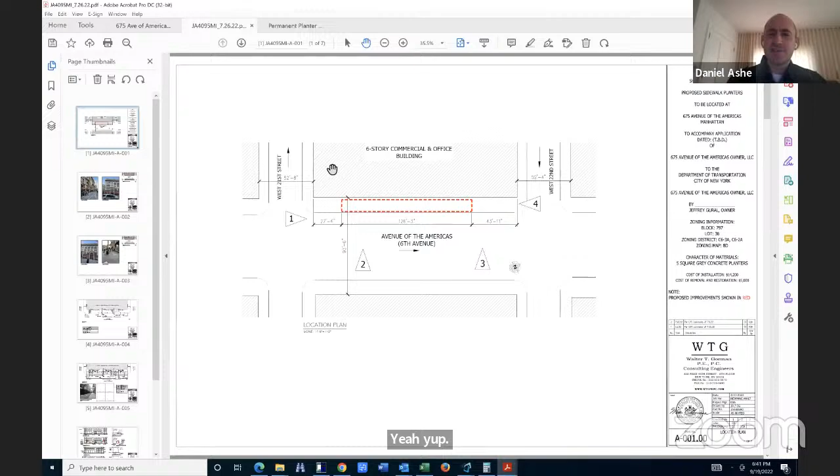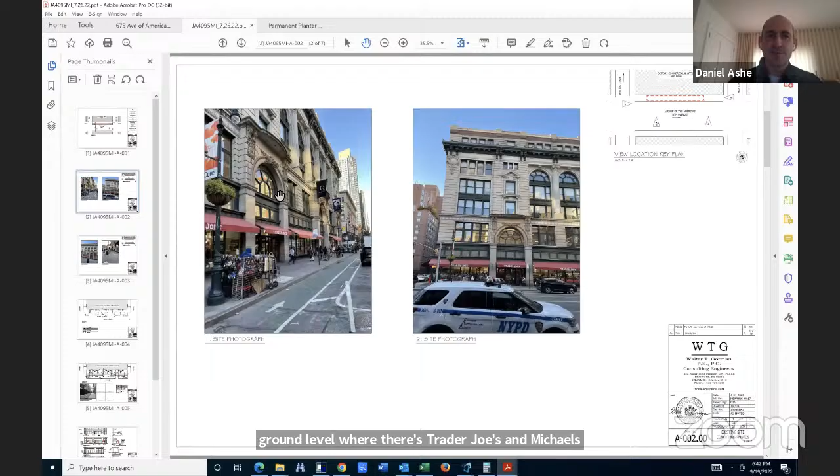Yep. All right, so our building is a 6-story building. It's mostly office, you probably know better the ground level where there's Trader Joe's and Michaels. And so here's some current pictures of the site. We're hoping to make it a little more beautiful to put in planters.

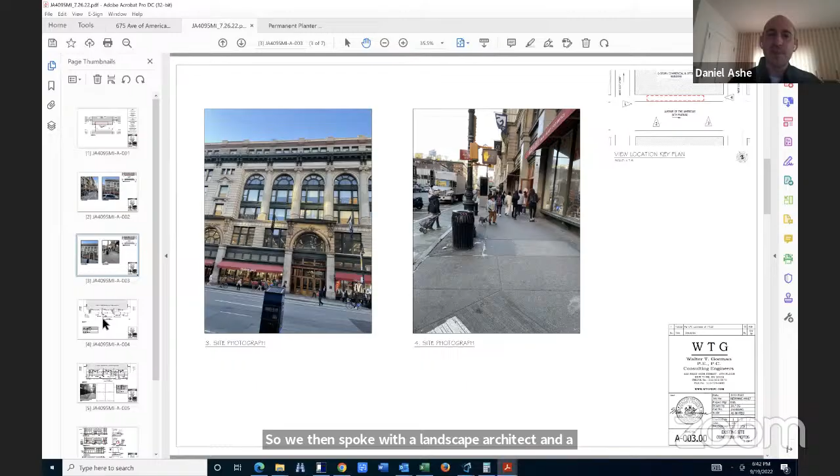Other places in the neighborhood we saw had it. We were trying to figure out the best type of planters, and we went over with the DOT and their guidelines. They were pretty strict on the type of planter that was allowed, the exact size. So we then spoke with a landscape architect and a landscaper to figure out what we can put in that would meet their requirements. And so we picked locations that met the requirements for separation from distances, from the corner of the property, from any parking meters. And we came upon our final decision of putting 5 planters here.

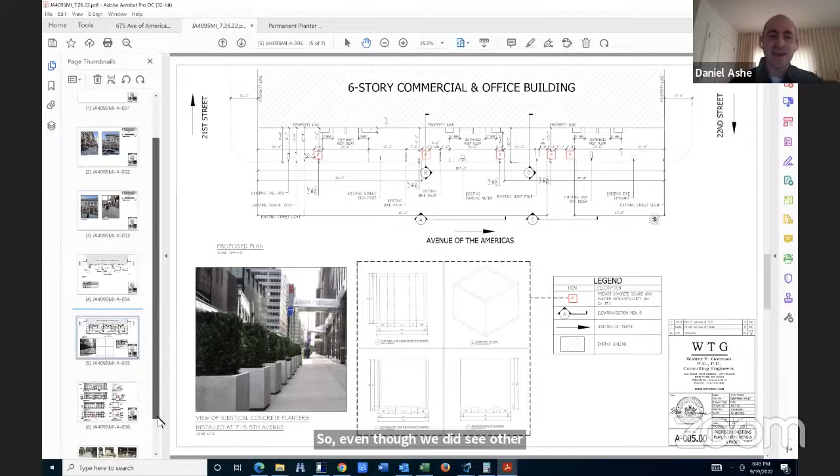As you could see, they're all going to be square planters, very similar to what this view is. DOT had requirements about the reveal, that it couldn't be touching the ground, that it had to be solid shape. So even though we did see other planters in the neighborhood that were different looking, we didn't feel that any of those met the requirements for the guidelines, and therefore we settled on this. The DOT, in discussing with us, we've gone through their preliminary comments and we've answered all of that already.

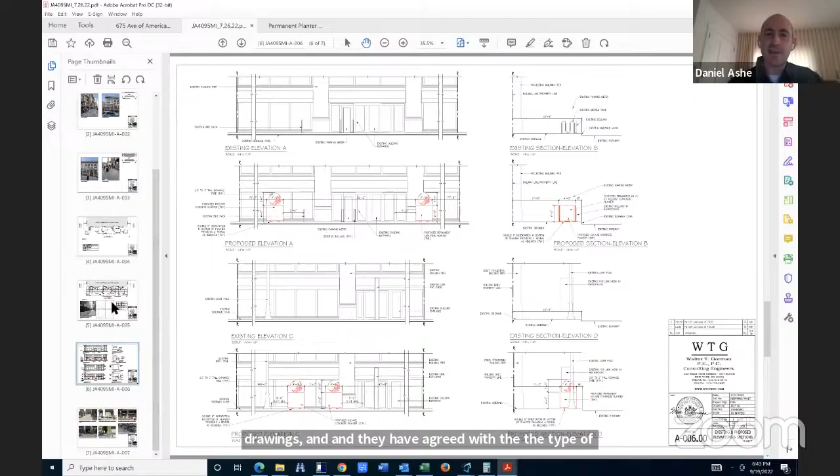So they've seen these drawings and they have agreed with the type of planter and the locations. Here you can see some other planters in the neighborhood that we took pictures of nearby, but varying shapes and sizes, not big enough to meet the 64 cubic feet requirement that the DOT has. And that's how we came to our design.

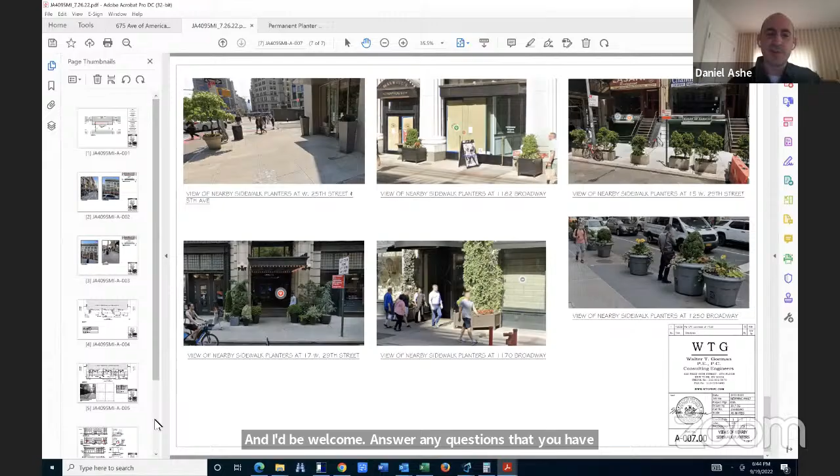And I would be welcome to answer any questions that you have regarding that, or to re-show anything that you want to see. Great, thank you.

I'm going to just give a little bit of background on what we've done since we got this application. We've just been going back and forth with LPC to ask them what are exactly the rules around planters. And this is a note, I quote directly from their note: when a planter is large enough to warrant a public hearing, elements such as size, spacing, aesthetics, and how it fits into the overall context of the neighborhood are all taken into consideration. Also, for this particular item, weighing an application's appropriateness is more focused on the streetscape than the building. So that's directly from LPC.

And we also spoke to the Community Board Transportation Committee, and they will be reviewing this application. So of course we can ask as many questions as we'd like to at this point, but our feeling is that whatever we decide should be conditional on what that committee says. So is there anyone else who has any questions? I see Lowell, and then Pamela, and then David.

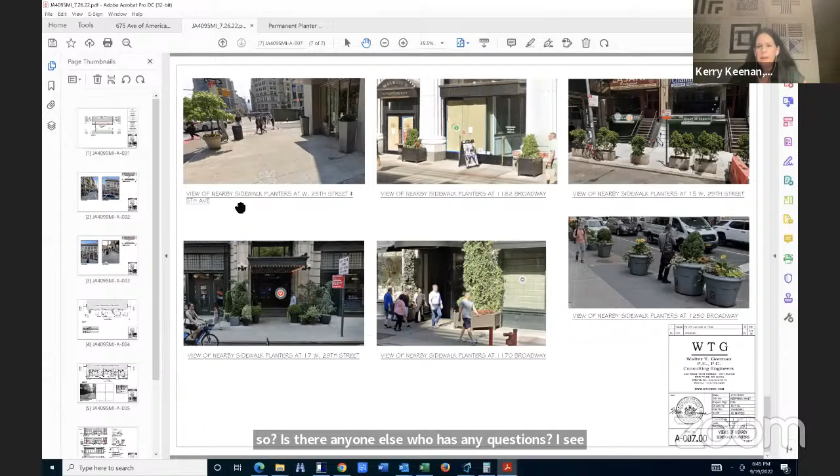All right, Daniel, could you go back to the picture of the front of your building?

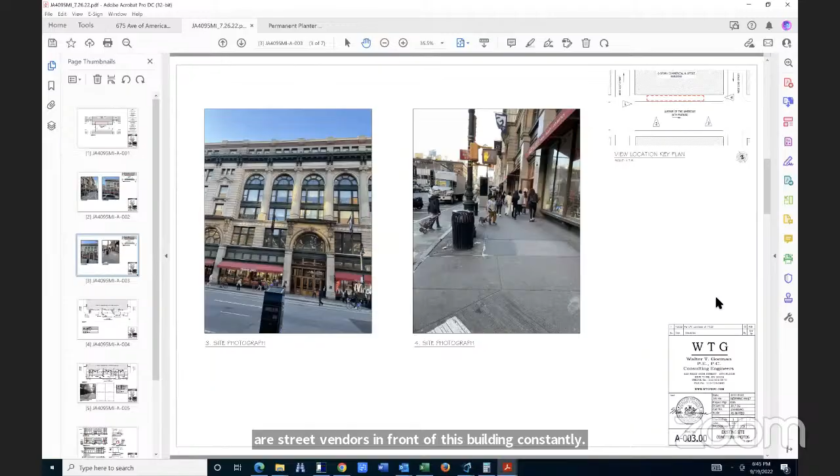See, I have a problem with this picture, and I have a problem with this application because I don't think this picture accurately reflects what the front of this building looks like. There are street vendors in front of this building constantly. You cannot walk down this block without seeing street vendors. And coincidentally, there are none in this picture.

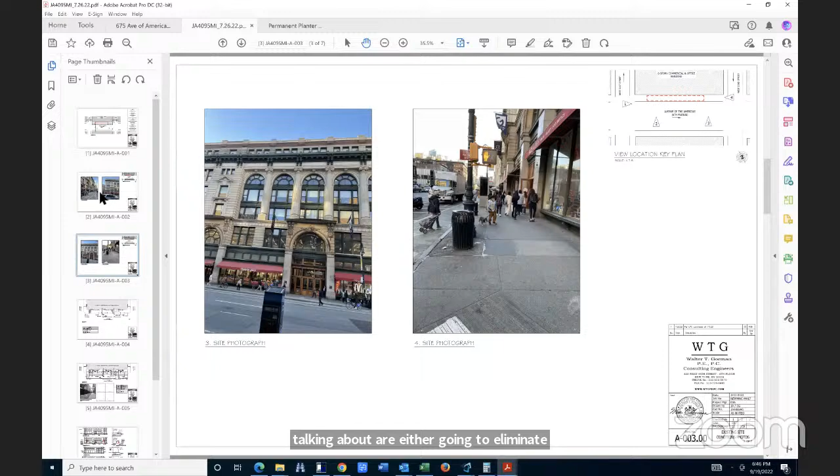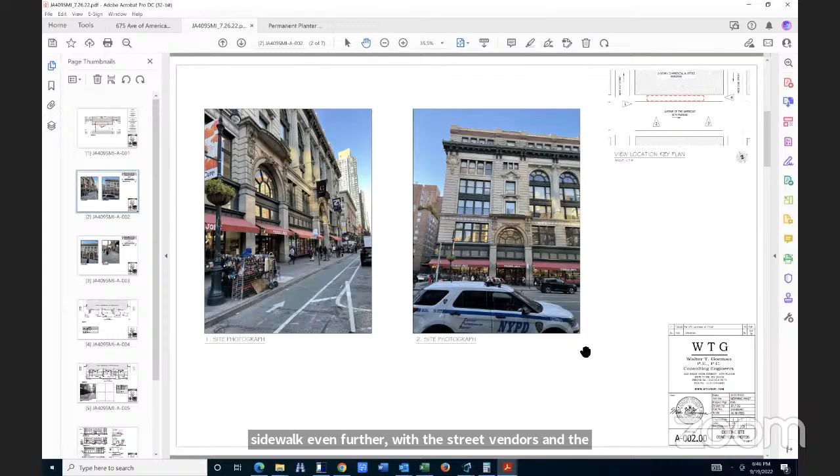I am concerned that planters of the size we're talking about are either going to eliminate the street vendors who are not here to speak for themselves, or are going to narrow the sidewalk even further with the street vendors and the planters. So I've got an issue with this, and I don't know how we represent the guys who are out there selling fruits and vegetables and whatnot, or whatever else they're selling out there. But these site photographs do not, there's one there, but this entire block is usually covered, and I don't think this accurately reflects what we're looking at.

Pamela, want to address that, Daniel? Well, these pictures were taken at different times. I know there are other vendors that come and go here. And they did have the opportunity to join.

We posted all the notices along the front of every opening in the building, so they would have seen it, anyone who uses this street for vending. Some of the vendors would be affected because they are actually not set up in a legal location to begin with. They're too close to the entrance of the property. So it is something that we want to keep this street in front of the building to have some consistency, and this will force them to a location where they wouldn't be out of compliance with proximity to the entrance.

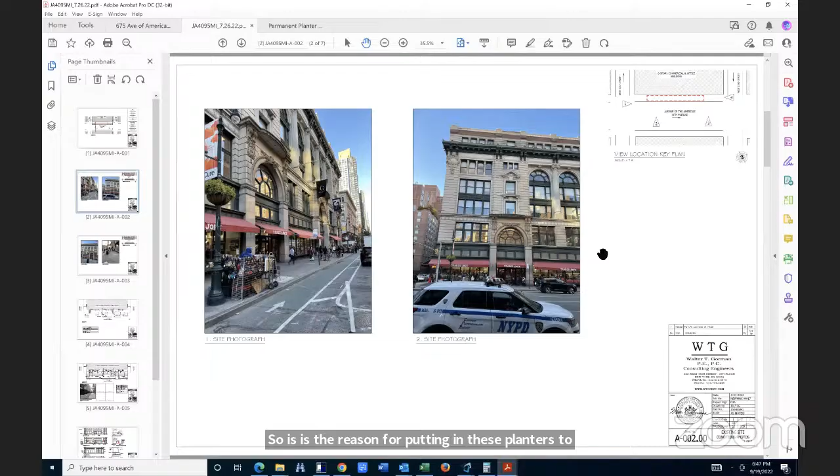So is the reason for putting in these planters to eliminate the street vendors? The reason I was given from the owners that asked me to get involved with this was that they wanted it to look better in front of the building. I'll read between the lines on that one. Thank you.

Thanks, Lowell. Pamela? Yeah, hi, I'm leaning toward Lowell's opinion here, but I do recognize that it's not always full of street vendors. There are generally more than just the one, the anchor guy that you see in the left side of the left picture.

Those that are not licensed, the vendors, do need to pay more attention to staying away from the primary entrance to the space, and I agree with that. The planters, I would like to know how much space there is between each planter for pedestrians who may want to step out through there and get clobbered by a bicycle they don't see coming. I'm a little concerned about that because it's directly on the bike lane, which is a very popular bike lane, as we all know. So I see a few hazards.

Also, I'm always very much in favor of as much green as we can get anywhere in this city. And I think the Ladies Mile further south from there has benefited hugely from having greenery, planters at the street and also on the islands. It's made a major improvement on 6th Avenue. So my concern again is primarily at the entry of the building, which should be left more open, and also pedestrians stepping through into the bike lane.

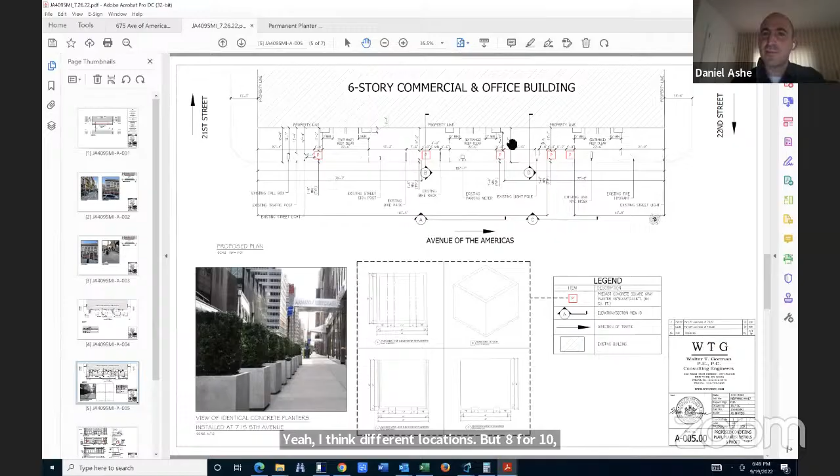So first, I want to make sure that the planters will be on the sidewalk portion. We're keeping a 1'6" between the edge of the planter and the edge of the curb, with the bike lane being over here. People will have the ability to step around it on the side closer to the building, where we're maintaining, in different locations, 8'10" basically between the planter and the building for the pedestrians to walk. In some cases, even more.

And I see you've left enough space at the entry so that there is a wide opening at the building entrance. Yes, we're keeping a 22-foot clear at the entrance, where we showed it marked off there. That doesn't show in the photograph. You can't really tell that in the picture.

From the, I don't think we did a mock-up photograph. This was just an example of what the planter looks like at another location. This is just to show you the color of the planter and what the plants are going to look like, and that there's a little reveal at the bottom. So you have 1, 2, 3, 4, 5 planters. Thanks, Pamela. David? Sure, thank you.

Lowell and Pamela kind of beat me to my questions, but I think the issue is what 715 Fifth Avenue looks like there, that's much different from what you're proposing, where these boxes are just kind of randomly spaced. Can you talk a little bit about that, or what the height of the planting will be?

I routinely ride in that bike lane, and I would be concerned about someone concealed behind a planter and a shrub suddenly stepping out. Is there going to be visibility through or around these? How tall do you expect them to be? What do you expect to plant in them? And do you have any rendering that shows the length of the block with the planters spaced as they would be, which is kind of random?

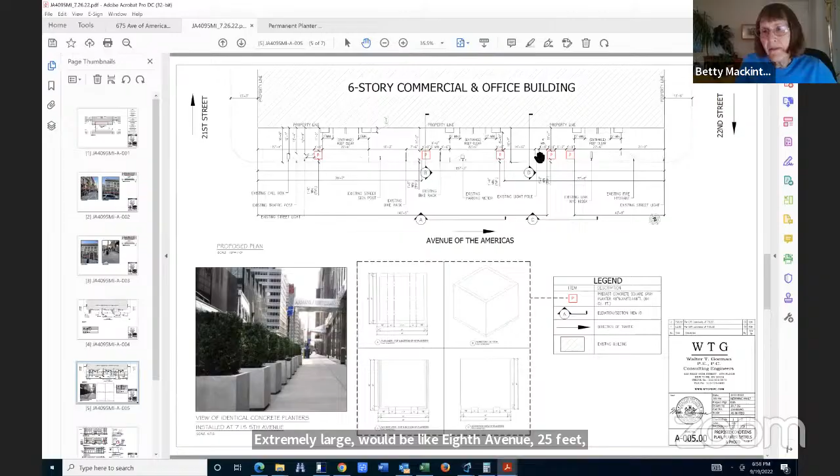Yeah, because I think Daniel said it was 8 to 10 feet. What is 8 to 10 feet? Between the planter and the building. Daniel, can you clarify that? Yeah, the minimum width between the planter and the building you can see here is 8 feet 10 inches.

So less than 9 feet. There it's about 11 feet. So is that the width pedestrians have to walk through? The entire sidewalk is about 16 and a half feet, and we're reducing it down to 8 feet 10 inches in the smallest area.

So it goes back up after that. That's only for 4 feet, and then it opens up again. Yeah, but when you're walking along the sidewalk, you're walking straight — it's a traffic jam, you'd have to go around. Anyway, I've made my point, I think.

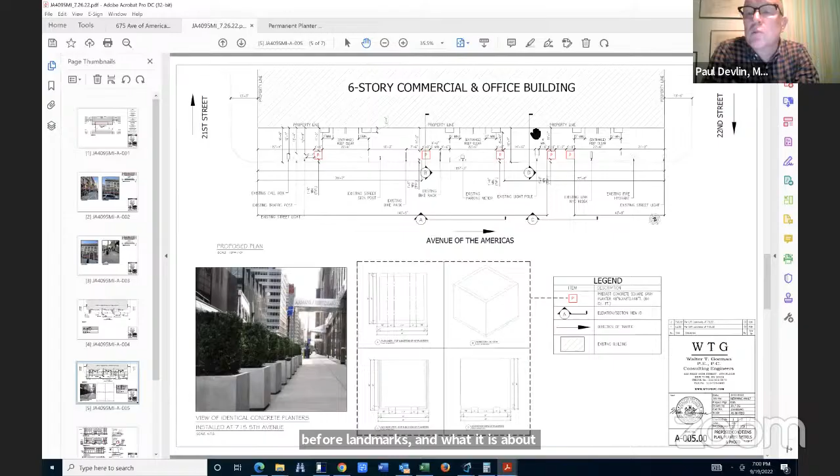From the land use perspective, and our request about a Landmarks Preservation Commission application, I would think we want to hear more about the landmark and preservation issues and less about pedestrian flow and width of sidewalks, because that will be tackled by transportation. So I'm hoping, Daniel, you can give us — you haven't mentioned much about why this application is before landmarks and what it is about these planters that is restoring some sort of historic fabric to this block. If you could address that, I'd appreciate it.

Would you like me to respond now? Yes, please. Okay.

Well, we're kind of handcuffed in terms of the look of the planters, in that DOT guidelines told us the color and the size. So this did not give us the ability to match it to anything historic along the building. And I don't think there's anything historic about the sidewalk through LPC. I could look at the designation photos, but I believe they just had a standard sidewalk to begin with. So there really is not.

I understand your question, and I would not say that anything in this application is to bring about any more landmark aesthetics. It was just to keep the sidewalk on its own, separate from the building, making it uniform and having some green area there, hopefully making it look better.

Are there any other committee members who would like to speak on this? Jesse, is there anyone from the public? Oh, Viren?

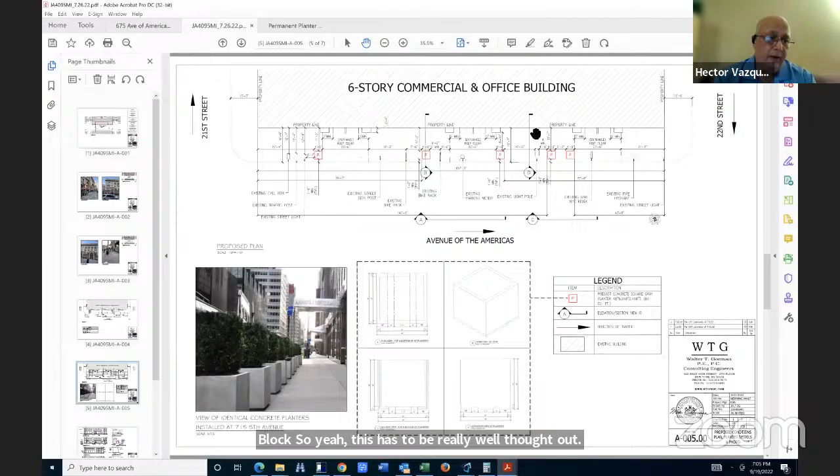Thanks, Kit. Hector? Yeah, rather than rehash everybody's comments, I'm in agreement with the bottleneck that these planters are going to create. Trader Joe's is right there, and I'm sure everybody remembers during the pandemic the lines that were formed out there. I can imagine, God willing we don't reach epidemic numbers again, but if there were lines out there again, that would create an even greater bottleneck. There's no open space, along with the safety issues with the bike lane and everything else. And it's already crowded as it is because of Whole Foods, Trader Joe's, and the other stores on that block. So this has to be really well thought out, and I think the planters are just way too huge to leave a safe, accessible walkway for pedestrians in general.

Great, thanks. I'm just going to go to Miran because he's not spoken yet. Hi, just very quickly - I just want to echo what Viren said. I'd like to hear more about what other options of beautifying the block have been considered. This couldn't be the only thing.

Great, David, thank you. Yeah, I think ordinarily we'd see a presentation that showed the planters in the context of the architecture and how they related, or maybe historic photos of the area that showed how these were in keeping with what was there historically, or honored an idea that was there before. We're not seeing any of that. And I think in general, in a historic district, when you're introducing something new, the most general thing you can say is that it should have a commensurate quality of design. This is just sort of random planters placed where they were able to fit them because they matched DOT's requirements. And to me, that's not up to snuff with what you'd want in a historic district. So I wouldn't be able to support this.

Thanks, David. Okay, Mike, and then we should probably try to wrap this up. No, just one final thought - was any consideration given to just some tree pits along the sidewalk there?

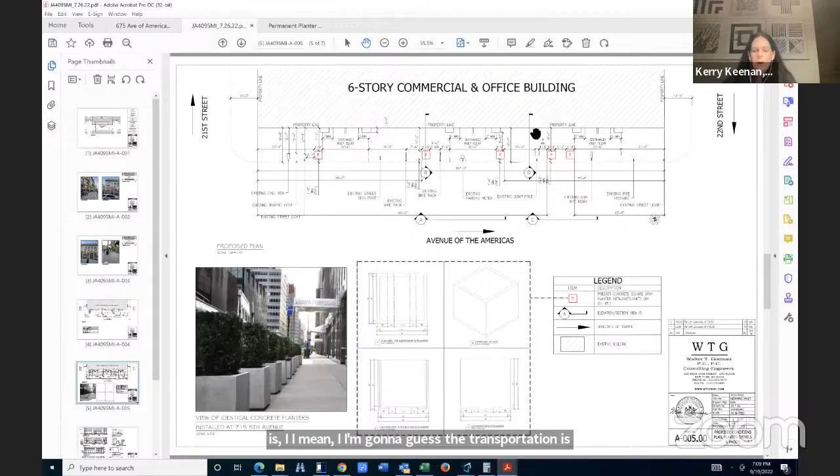So Paul, I see your hand is raised. Yeah Kerry, can you reread the language you read earlier about what LPC said?

Yeah, in regards to this, because again we're talking a lot about issues that are not in our purview. And I think if we're going to write a letter, it should be addressed to tackle the LPC issues. And then within our letter, we can defer to transportation on these other conversations.

Here's what it says: when a planter is large enough to warrant a public hearing, elements such as size, spacing, aesthetics, and how it fits into the overall context of the neighborhood are all taken into consideration. Also, for this particular item, weighing an application's appropriateness is more focused on the streetscape than the building.

So I actually think what we're discussing is really quite relevant. All right, I agree. And we were unclear a little bit too as to why this was coming in front of us, so we went and did that research.

So I do think all of the concerns that everybody has brought up are appropriate for our committee. I know that you will also have to go in front of transportation, and they will be even more focused on congestion and what's happening on that street, and how wide the sidewalk is, et cetera.

Does anybody have a motion that they'd like to make? So moved, the way you described it, Kerry. So moved, approved, recommended to approve, deny. I don't think I can make a motion.

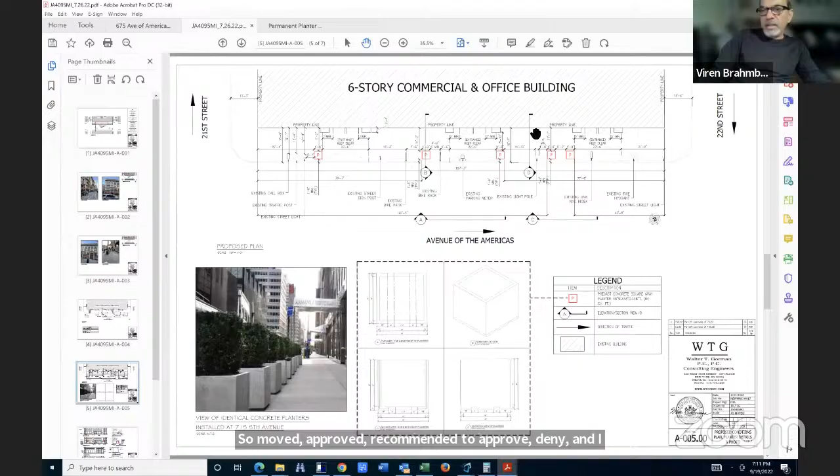Taking into all the concerns expressed by the committee, motion to deny. I would second that.

So let me just be really clear. It's a motion to deny for the aesthetic historic fabric of the neighborhood. We're not really sure why those planters are in those spots, et cetera. The concerns that we have with the sidewalk itself, the amount of space for pedestrian traffic, the vendors, all other things already on the street, the lights and the mailboxes and the links, and also safety of bikers and pedestrians regarding the bike lane and the visibility. All right, and size and the overall quality of the sidewalk.

I would lead with the things that you read before, Kerry, that Landmarks expressed as concerns, because they're always happy to say well, the other things aren't our purview. I know. Okay, all in favor? Aye. Aye. It looks like that passes.

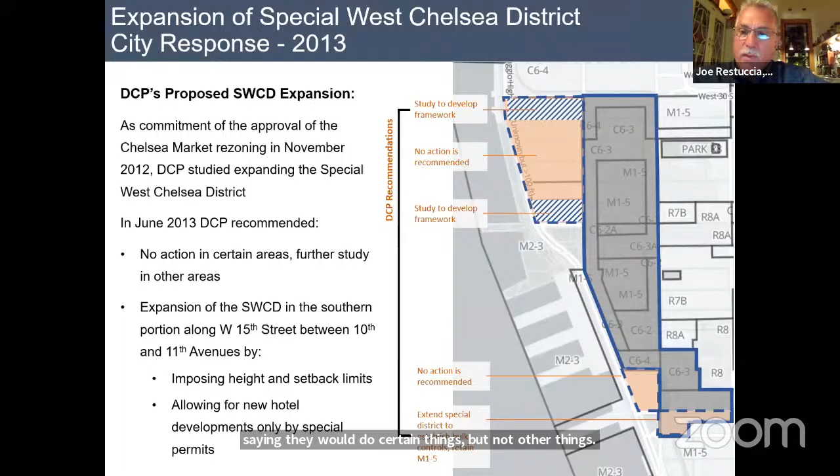This is the Chelsea Market rezoning from 2012. We asked for a follow-up study as to why certain areas of West Chelsea were not included in the West Chelsea district, which was established in 2005. The goal was to create more locations for affordable housing to be built, through inclusionary housing. In 2013, the Department of City Planning responded saying they would do certain things but not others—they wanted to look at frameworks. And the big issue was we didn't want hotels west of 11th Avenue.

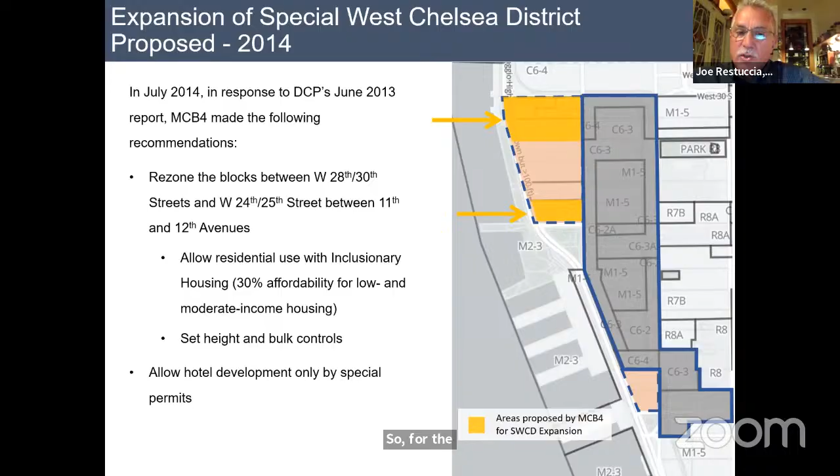Then in 2014, our board responded and came up with specific recommendations through the Chelsea Land Use Committee to rezone certain blocks to allow for expansion and for affordable housing to be built as part of it, with certain additional height and bulk controls that exist in the West Chelsea district.

The next thing that happened after a framework was developed for block 675, that's 29th to 30th Streets, 11th to 12th Avenues, an actual zoning proposal from 2 different developers, and originally a third for the entire block, was put forth. Those rezonings went through a full ULURP and were adopted in 2021. What happened in those 2 sites, it was rezoned from a manufacturing zone to

This is Starrett-Lehigh first, and it was specifically to allow more commercial use on Starrett-Lehigh. I apologize.

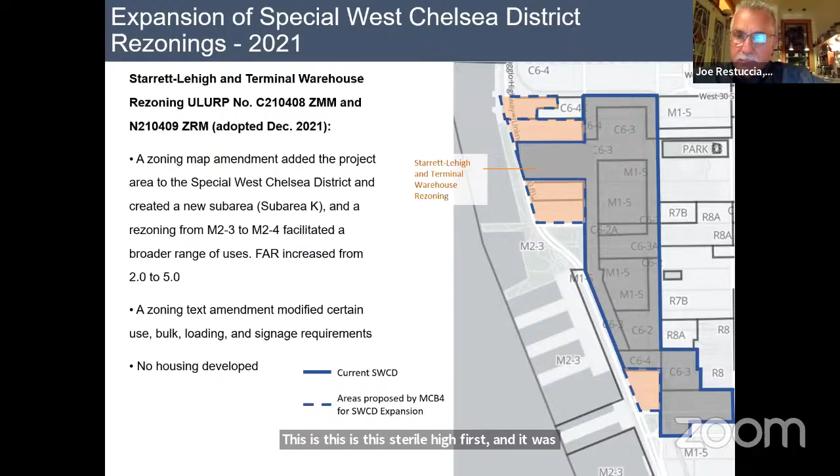We also dealt with block 675 as part of this. That's the 29th to 30th, 11th to 12th Avenues, 2 separate rezonings that were handled in different parts of the plan that allowed rezoning from manufacturing to C6-4, commercial and residential use. In fact, there are 2 new buildings under construction, one that has just been recently completed, 601 West 29th. This part of the district also allows the use of Hudson River Park development rights, and we'll look at that

in another section. Right now, we have in front of us 2 areas that have not yet been rezoned. The balance of block 675, which this committee had dealt with recently regarding the Gateway Tunnel and the EMS site, and B, which is the entire block to the south between 28th to 29th, 11th to 12th, and that is Con Ed.

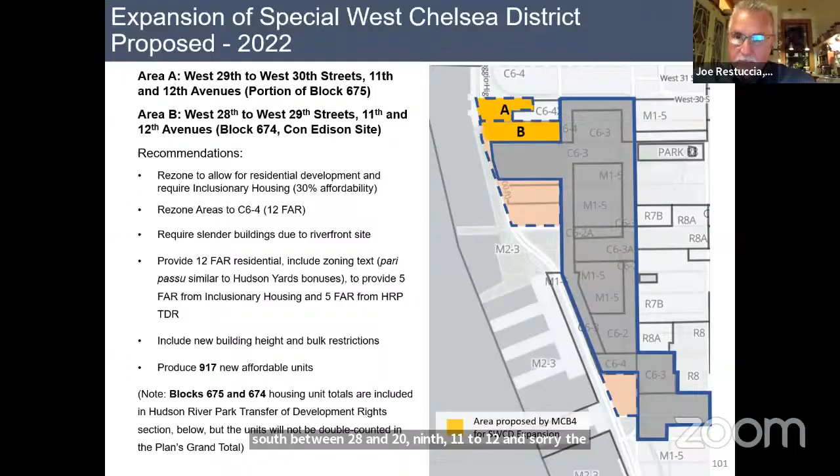The last are a series of public uses to the south, right north of Chelsea Waterside Park: the post office vehicle maintenance facility, and the sanitation maintenance facility. Again, we asked for this to be rezoned, this time not to C6-4, but to C6-3, 7.5 FAR, consistent with the zoning that exists along West 23rd Street, a lower density. These sites together would produce 442 units of affordable housing.

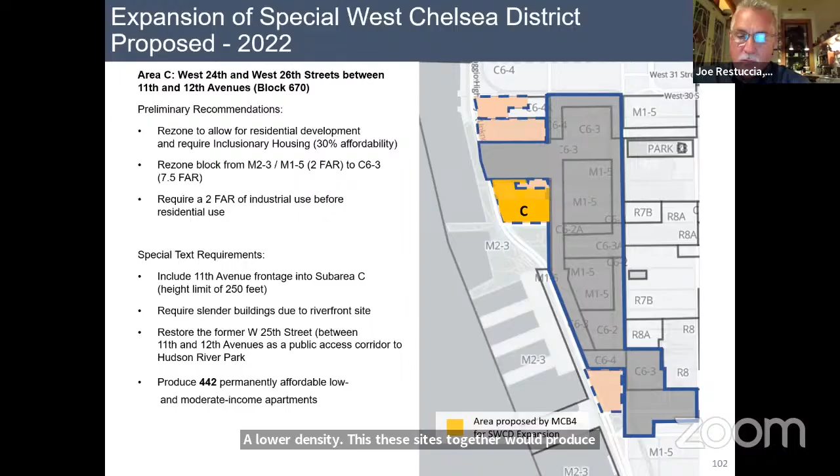Looking at those sites in broader detail, you're seeing block 670 and a portion of block 671. Again, this would require a combination of use, industrial use, because those are facilities that either support the post office or sanitation, and then being redeveloped as a combination at the base, maintaining those uses, but then new housing above. In total, this request would bring approximately 1,771 affordable units into Chelsea if these rezonings were done.

So I want to stop there, Jessica, and take questions about that section first. Thank you. Looks like Lowell and then Paul have their hand up.

Joe, for the vehicle maintenance facility, you would propose putting apartments on top of where the trucks are coming in and out? Yeah, we have a lot of these facilities along the west side. Remember, it was all manufacturing. So you have the Quill bus garage, you have the marshalling yards, all meant to handle lots of trucks. The general idea is build above these, orient the truck entrances toward 12th Avenue, the highway, and orient the residential toward 11th Avenue.

As part of the Port Authority redevelopment in an area called Galvin Plaza, which is the major entrance to the tunnel, they're proposing to build a new set of ramps over that, and above that, residential on the 10th Avenue side. So this has been very much kicked about for a while, as our neighborhood keeps on changing.

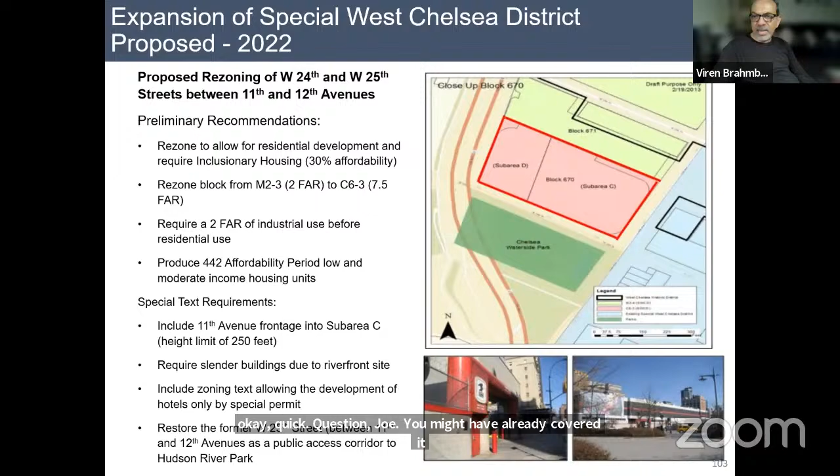Just a very quick question, Joe. You might have already covered it. The TDR, the transfer of development rights, are they tied to the blocks? In other words, if the Postal Service or anybody else chooses to transfer the rights, is that something our proposal is going to preclude, or is it something we have no control over?

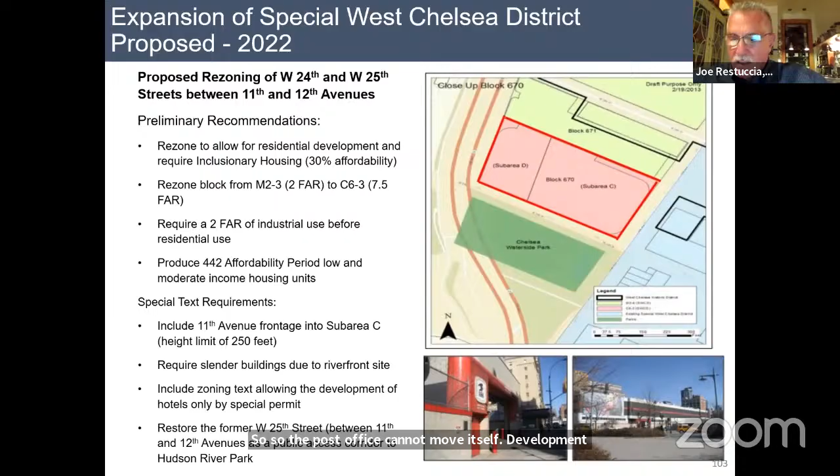So the post office cannot move its development rights. However, the Hudson River Park Trust can, and that is here in the next section, which we'll go through very quickly. There's a few sites in Chelsea. So this whole issue here, one block upland, meaning from 12th Avenue over to 11th.

HRPT can transfer unused development rights from anywhere in the park to a site through a whole special permit process. We've looked at two of those, Block 675, the Lalezarian deal and the Douglaston deal.

So you can see we did this here, and 234 affordable units came out of that. The park got 37 million plus an additional 3 million, so that's 40. And then with the Lalezarian deal, the park got 11.2 million, and we negotiated an additional 1 million. That's 55 affordable units there.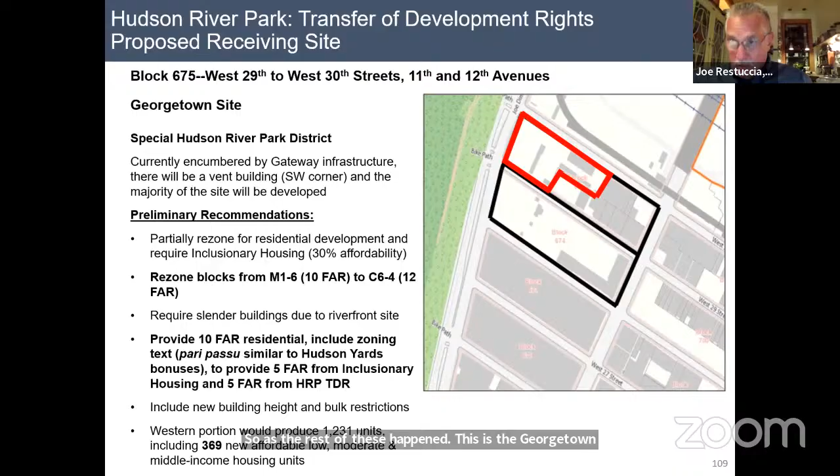So as the rest of these happen, this is the Georgetown site, the balance of block 675. That's eligible, Viren, for that special permit if the developer chooses. The Con Ed site is eligible also. And then the other ones are further north.

The one north of the post office site there, we felt it should not go to an FAR of 12 because it's right opposite the park. That should be lower, more consistent with the 23rd Street corridor, which is currently a 7.5 FAR. That was the underlying thinking, the underlying planning thinking.

Okay, all right, so there's no mechanism to lock it to the site, that use-it-or-lose-it scenario. We don't have any mechanism to make that happen. Am I right, there's no mechanism to move anything off the post office site whatsoever? No. Okay, got it.

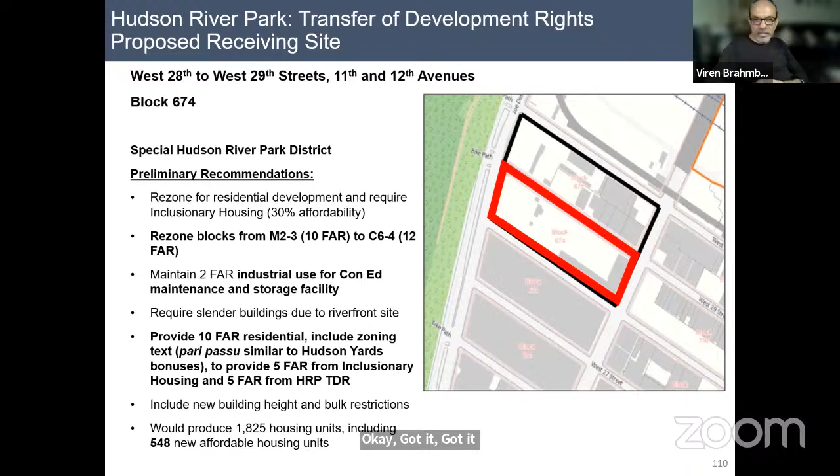All right, and the last quick question, it probably might not be the right place for it, but since we've been talking about sustainability and resilience, in terms of materiality, a lot of new stuff is being discussed with decarbonization at DCP, like timber construction and whatnot. Is that something we get into at this point, or not?

Well, all the new local laws for decarbonization are going to apply to every single new development, period. And the phase-in is happening much faster than most people realize. It's also being looked at for retrofitting older buildings, and the square footage has shrunk as to what the targets are. Affordable housing, some is subject, some is not. So these things are something I think both land use committees should look at in general, because they are now going into effect. Yes. And let's all knock on wood that we get there, but at least they're starting.

Thank you. Jessica, can I move to the next two sections? Please. Okay, so the next one in Chelsea is the Morgan Post Office.

And this has been in the plan since 2015. For those of you who don't know, the Morgan Annex is the block south of the major Morgan building between 27th and 28th Streets. That block was full of housing. It was demolished. The Hudson Guild was on that block at one point, originally demolished, right?

So we're looking at a location where there was a negotiation more than 30 or 35 years ago with the post office. And in fact, there are foundations put into that building and steel columns to carry housing above. It has never been built.

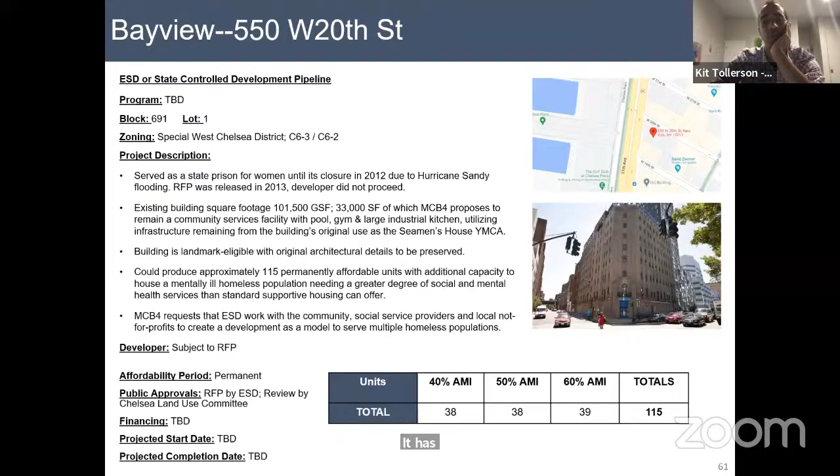So I'll get those maps to you guys. Do those maps include like private schools? Because I know that Chelsea Piers has a daycare, and it has significant after school and summer programming for kids. I wonder if those actually made it into the way that we thought about this. What I'd like to do is send you guys the maps and then get information that we're missing back, and I'll get them revised, because the maps are always an ongoing process.

Sure. Yeah, no, and Guardian Angel is a parochial school that's right there. Because all for this use of this space, just not super confident that individuals needing the highest level of care is the exact best spot.

Betty, you had a question? No, I think I wanted to ask or comment that there's also the roof. There's a huge roof area that can be used for different possibilities. That's it.

Emma? The same question applies here about the mechanicals. In the flood that shut that building down and got it evacuated, the boilers went under and stayed under, and that's a whole issue about the floodplain and raising the mechanicals into the building somehow.

What effect does that have? All mechanicals will have to be off the ground floor entirely. But additionally, Pam, because if it's renovated under the new rules and regulations for carbon, you would not be able to put in a gas boiler, for example. You'd have to go all electric, which means it's a whole different system and where these things go.

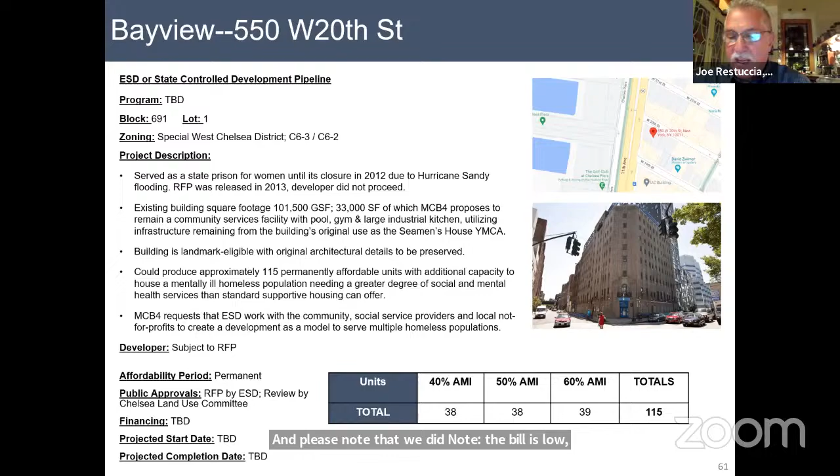Jessica or Carrie, any questions from you guys? I think you're just obviously hearing, as you would imagine from any committee, lots of opportunity and concerns alike, and the opportunity that should any of these find traction, which I think we would all be excited for, because underutilized space at any level, whether that's air or in Bayview's case, an empty building, is certainly not serving any of us well. So I just think that as early and often as we can be engaged in these conversations and or helpful, right? And so in particular for things, it seems like Bayview has found a course, at least right now, as a result of the Penn Station redesign, but certainly with the Morgan Annex and anything else, if there's an opportunity for us to have discussions with electeds or facilitate opportunities for development at the public or private level with these pieces in mind, I think this committee would be eager to participate in those discussions.

Is there anything we can do to help advance that, and be prepared should things move forward?

Well, one of the things I've been thinking about since the last committee meeting, maybe the board over the next year should be seeking to meet with some of these large institutional players, like the post office, like Con Ed, to discuss the future of this block. Because although Con Ed says they need that entire block for everything, they probably don't, and they're going to come one day for rezoning. So just being a little more proactive as we're moving ahead, but with the large players, because I think those are the ones most interested, and we'll talk to our board.